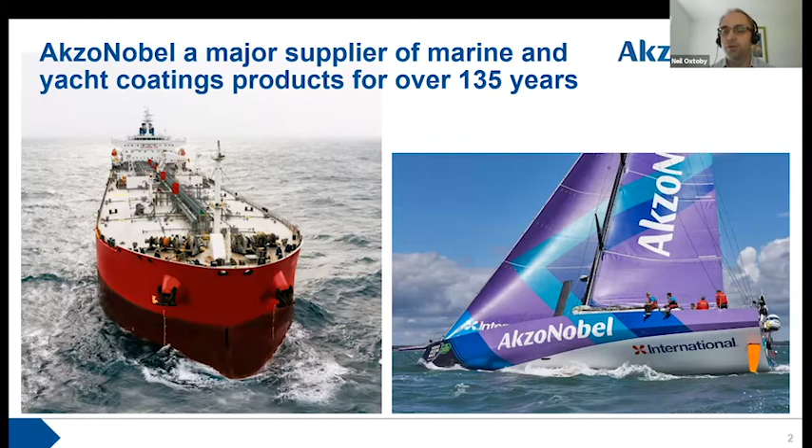As an industry and as a company, we do move ahead of legislation and regulation. So we're not just driven by that, we are trying to move ahead of that. We are proactively trying to eliminate materials that are hazardous and take a sensible view of the world. So as I said, I work in the marine and the yacht part. We're actually the marine protective and yacht part. So we coat anything that comes in contact with the sea. So you've got ships, but there's oil structures, they have fouling as well, and yachts and things like that.

So there's the brand names here that you may have heard of. And there's the R&D global footprint. So I'm based in Felling in the north of the UK, but it really is part of a global team. So I've got colleagues that I collaborate with in Singapore, in Korea, China, America, and you can see we've got a spread of labs globally here that are trying to develop products for our global customers. And we've got quite a few more manufacturing locations. So if we're to include manufacturing locations in that, there'd be a lot more on the map. So we're trying to develop solutions globally for our customers, wherever they are in the world. And they'll have different challenges and different needs and different requirements.

So if I talk briefly about what biofouling is, this is the unwanted organisms on immersed structures. There are five images, and there's quite a range there, from hard animal fouling in the top left to slime in the bottom right.

Marine architects spend a long time trying to come up with a nice shape for a vessel that makes the fuel use as minimal as possible. When you put those into the water, marine growth will start very quickly. For those of you based in Singapore, it's a very aggressive fouling challenge there, and within a few days you will start to get things growing on a surface. In the cold North Sea, near where I am, there's less of a fouling challenge, and it'll take a bit longer. So there is a need for different products for different locations, different operating profiles, different customer demands.

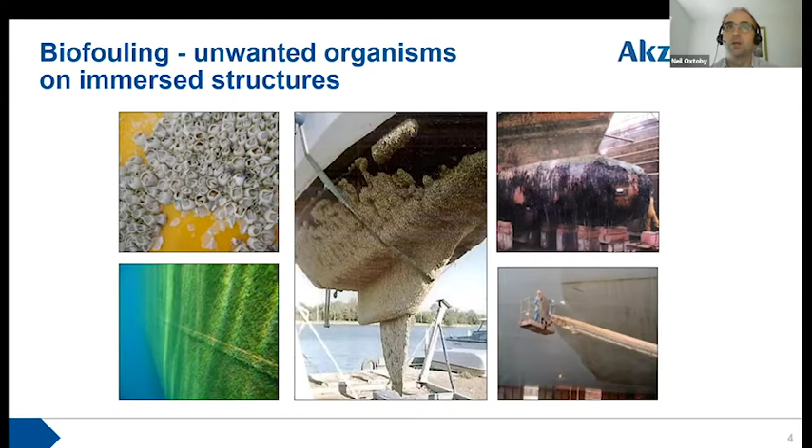As well as fuel, there are obviously other things that happen when you're burning fuel, so there are greenhouse gases. IMO is the UN body that represents the oceans, so it's part of the UN. They estimated in 2014 that if the global shipping industry was a country, we'd be the equivalent of one of the top 10 countries in the world in terms of greenhouse gas emissions. That is because most goods are moved around the world by shipping.

They had 4 estimates in this 2014 study that CO2 emissions would grow between 50 and 250%, depending on various economic outputs and scenarios between 2014 and 2050. There's also an ambition to reduce the levels by 50%. So there's a mismatch there: a growth in greenhouse gas emissions and a desire to reduce them. And biofouling can have a big impact. It can add 40 or 50% to a vessel's whole emissions. So by using the right coatings and reducing the drag, you can reduce fuel and also the associated greenhouse gases.

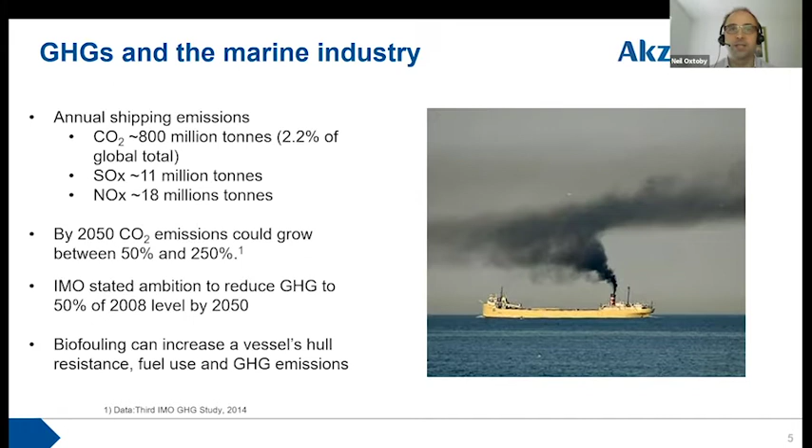There are some recent changes in the fuel landscape. IMO, this UN body of the sea, at the beginning of this year introduced a reduction. There's been a sulfur limit on fuel use for a few years; I think 2005 was the original global restriction. And that's been reduced from the beginning of this year. A 77% drop is their estimation. So it's going to have a big impact on human health, especially if you live near a port city or a coast, and it's also going to reduce acidification of the oceans and various other things.

But one of the side effects of this for the shipping industry is that you need higher quality fuels, so this is again pushing up your fuel costs. So again, there's an economic driver for vessel owners to use a good anti-fouling to prevent the fouling. The alternative to a better fuel would be a scrubber, which would remove the sulfur before it's emitted, but that again is cost.

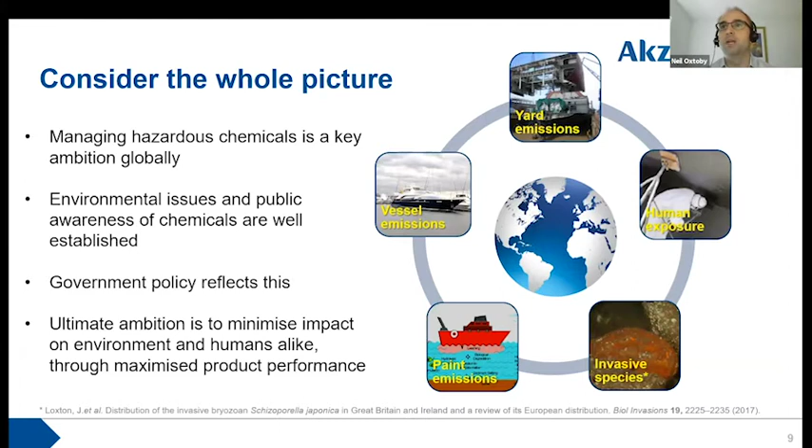Specifically for anti-foulings, there's quite a lot of regulation. So again, at an IMO level, a global level, there's the Anti-Fouling Systems Convention. This is sometimes referred to as the tin ban. This was used to ban TBT. More recently, under that global convention, there's another biocide, cybutryne or Irgarol, that is being proposed to be banned at a global level. COVID has delayed that, but that's likely to go through this year, and then with a time frame to follow in the next few years.

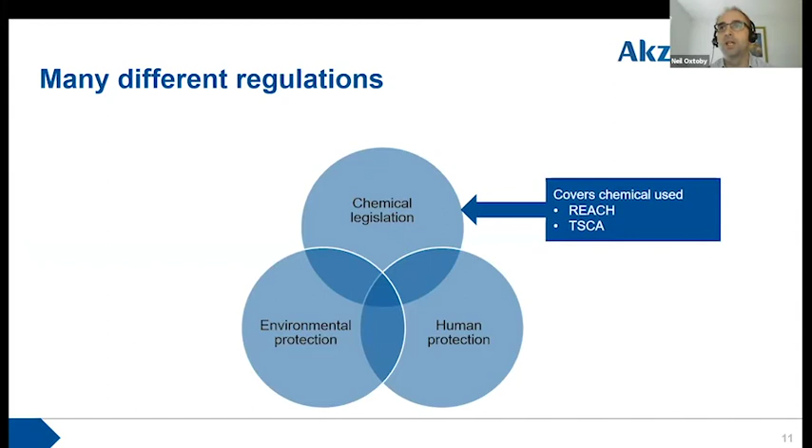There's regional regulations, so BPR and things like that at an EU level, and then there's a lot of national. There's Turkey BPR, KBPR, Australia and the US all have these. So regulations are rightly in place to ensure the responsible use of biocides. But there's not just those regulations that impact on anti-foulings. So there's chemical legislation. This is things like REACH that are covering all chemicals used in all coatings. There's human protection at lots of different points, so application, removal, things like dermal contact with the coating.

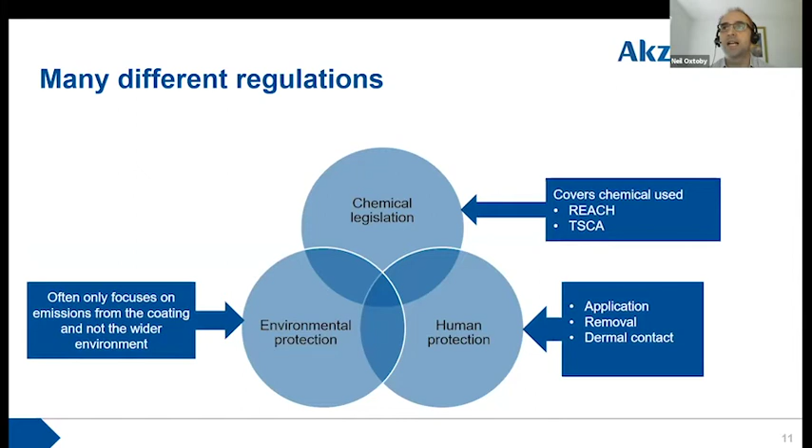And then there's environmental protection. So this often focuses on what comes out of a coating, but there's also those greenhouse gases and NIS impacts that should be considered. So anti-fouling coatings sit in the middle, and I've shown them overlapping, but they don't always overlap. So sometimes the legislation and regulations don't always work in the same way. And there's a danger that they don't have a harmonious regulatory landscape.

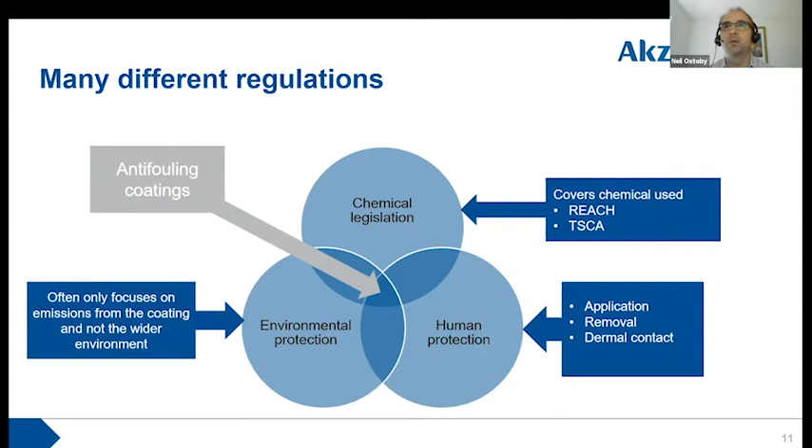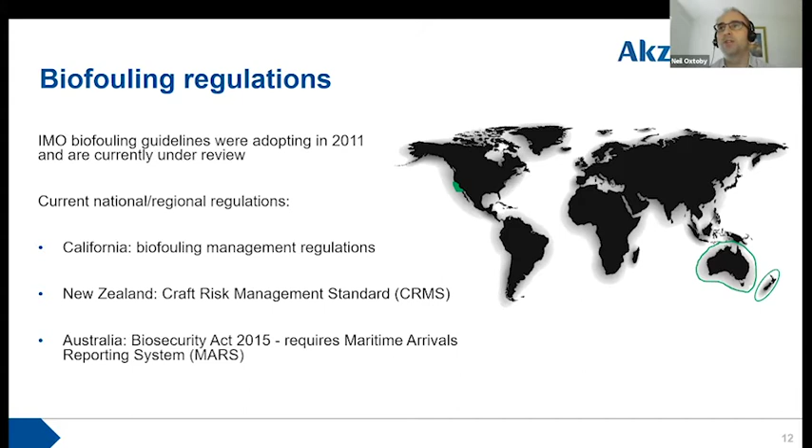A slightly different sort of regulation is the biofouling regulation. So this relates to the amount of fouling that's on the vessel, how good a product you have. So there are some countries that are now looking at how much fouling is on your vessel, how clean it is. And as I talked about earlier on, the best way to prevent fouling is to have a good coating system. So there's California and New Zealand, and Australia has a Biosecurity Act, and they don't have formal regulations yet, but they're on the cusp, I think, of having those. So there's some regions where, as a ship owner, it's important to have a clean hull, as well as having other things.

So in summary, there's a lot of regulation and legislation, but you need this to work in a harmonious way that works together. You could imagine that if you had overly conservative modeling, so some of the regulations are based around modeling, and if these are overly conservative and take something that's beyond a realistic view of the world, there's a danger that you may unnecessarily remove products from the market. If that happens, then you're reducing availability of effective products, and potentially, in an extreme case, all the effective products in a particular market. And that will lead to increases in greenhouse gases and NIS.

Also, the shipping industry is a global industry. It operates across borders and regions, and so having misaligned national and regional regulations may be ineffective. If a ship owner cannot get the coatings they want in one region, it's possible that they will go and get applications in a different region. And we've got a changing landscape with these products. A changing landscape should stimulate innovation. But unfortunately, there's also a lot of uncertainty. And it's that uncertainty that's hindering the innovation, I think, in this area.

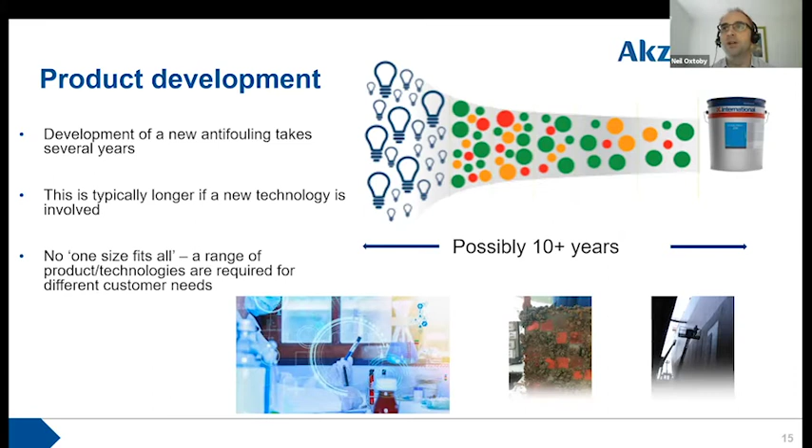So there's been legislation and regulation for a while, but this hasn't ceased the development of new products. So there are new products still being developed. There's a couple on the right from my company, but there's a range across the industry. So new products continue to be developed.

And I think customers are better placed than ever to really understand the performance of an antifouling. So there's ISO 19030, which is an ISO standard allowing customers to look at the fuel they are using and link that to hull performance. So they're then able to understand, is the hull performance they're getting and their fuel use really down to the antifouling choice? And understand and measure and maybe justify internally the choices they're making in their antifouling.

So that's very data driven and fuel and sensors, but there's also drones that allow visual inspection. So it's a lot easier than it's ever been to have a look at what is on your hull. Is there any fouling? Is your coating system working?

There are a small number of biocides that are available. So I think the focus is going to be on making the optimum use of this available toolbox. It's possible that new biocides will come onto the market, but there's a huge cost. This was mentioned a couple of weeks ago in the first webinar. There's a big cost, a big barrier to entry for a new biocide. So it's not impossible, but I don't see a huge number at all coming. So I think the focus will be on making the optimum use.

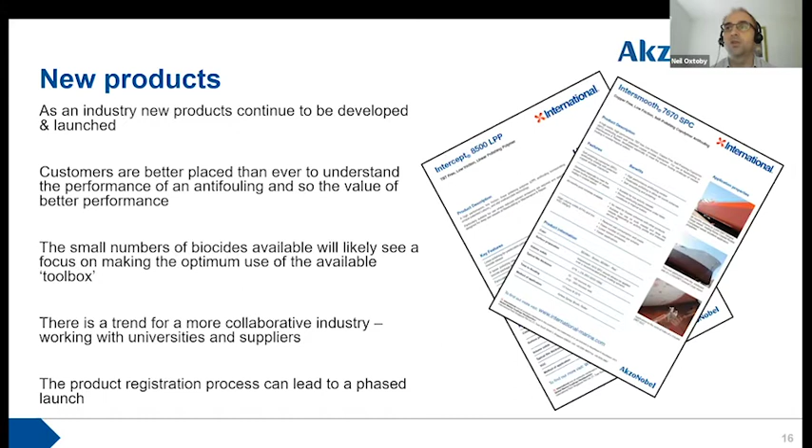And I also think there's a trend for more collaboration. As I talked about at the beginning, I'm part of a global team within my company, but there's also a lot of work with universities and suppliers and third parties. So I don't think anyone has all the answers anymore and can do things in isolation. On product registration, this can lead to a phased launch. So you could be getting some products in some regions faster than others just because of the process of registering a product.

So until now, I've talked about biocidal products, and there are other options. Biocidal products dominate the market. But for some customers, there are effective non-biocidal fouling control options. So fouling release has been on the market for over 20 years. And for some customers, this is a better option. It gives them less fuel use, less drag, less invasive species, all of those things. So it doesn't work for all customers.

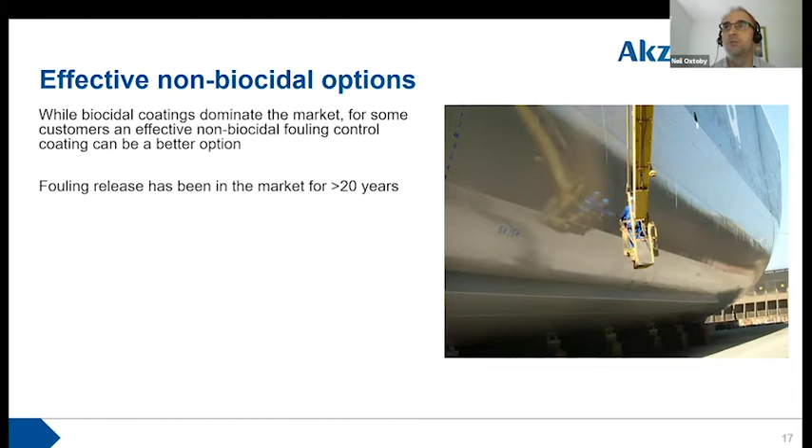But there are some areas of the market where there are some non-biocidal options. And then there's alternative technologies. So as I talked about collaboration, AkzoNobel are working with Philips to look at an alternative solution. So we're looking at UVC. This is used to prevent fouling in different scenarios, and it does work in a marine environment.

So this is a tile here. This is where there was UV that was preventing the fouling that's grown around it. So there are other options, but as I talked about with product development, this is a more different technology. This is using tiles effectively to tile a hull, and therefore your product development timeline becomes longer.

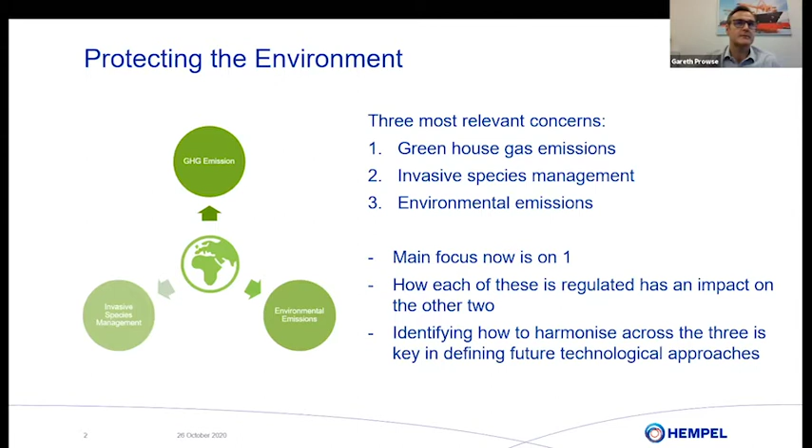So if we go into a bit more detail on greenhouse gas emissions, if I can get my slides to work, sorry. We see that the biggest focus now at IMO is to decarbonize by 2050, as Neil's pointed out. So we've got initiatives in clean fuels, retrofitting equipment to vessels to improve efficiency, and then ultimately novel vessel design, which are various designs now drafted, getting ready to be produced and built in the future

to give us this decarbonization process by 2050. The efficient vessel design, which is seen as the sexy stuff or the heavy engineering where everybody focuses in these discussions, that introduction of these designs is very slow, and we'll touch on why that is in the future slides.

Retrofitting of new equipment is generally costly, but we're going to see some changes there as IMO bring in the revised EEDI rules, the Energy Efficiency Design Index rules, which will move things forward in terms of what vessels have to achieve. And major improvements need to be put in place very quickly because the lifespan of a vessel is very long. So if you don't have stuff in place by 2025, you're never going to hit the 2050 targets because the vessels won't be renewed because the owner wants to keep them in operation for the longest period of time possible. So in that regard, hull efficiency remains critical, irrespective of the solution adopted.

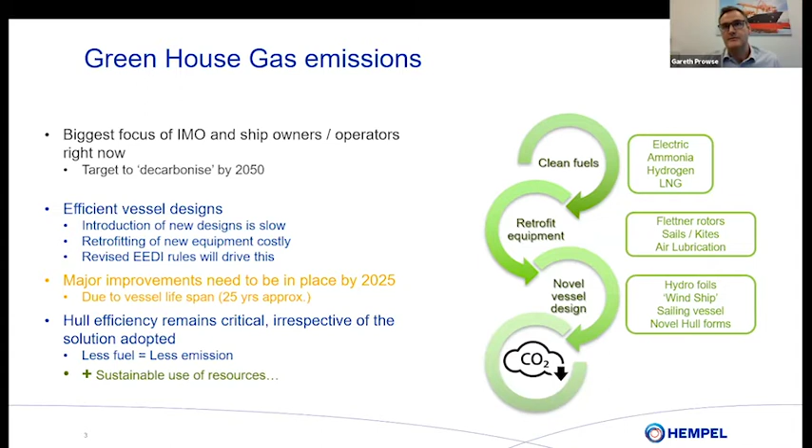Less fuel equals less emission, plus a sustainable use of resources. There's always a cost in terms of carbon release. Sometimes at the stack emission if you're using fuel there, but if you're using clean energy like ammonia and hydrogen, you've got a production aspect to that too. So the sustainable use of things is very important to achieve these CO2 emissions reduction. The solutions are being used right now.

The survey of vessels built in 2013 to 2017 showed that lots of vessels were actually complying with the IMO interim target 2025 to reduce emissions by 30% right now. So 70% of containers, 26% of oil tankers. So it looks like we're making good progress, but when you look at the actual numbers involved in that cohort of vessels, actually we're making big progress in small areas. Where we need to get things moving is on bulk carriers, where there are lots of vessels out there, but progress to efficiency is actually quite low. So only 1% of bulk carriers carrying these devices or improvements to pick up their efficacy.

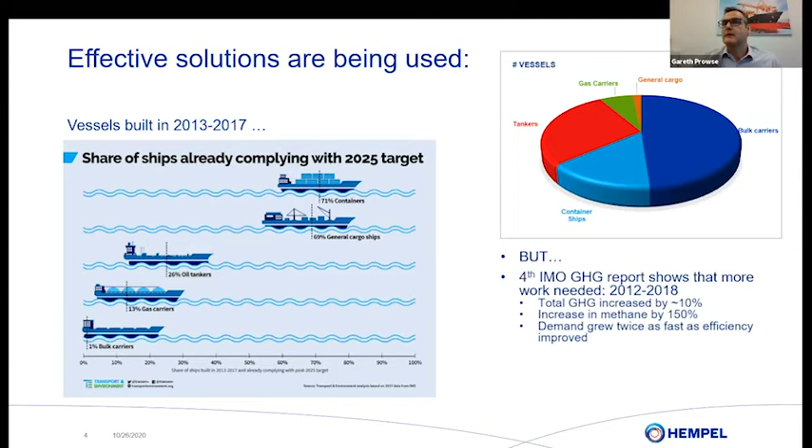And also when you look at the fourth IMO greenhouse gas report, we can see that we're not hitting the targets now. So total greenhouse gas increased by 10%. There was an increase in methane by 150% as vessels started to convert to LNG, and demand grew twice as fast as efficiency improved. So there's a big increase in efficiency need across the fleet, and coatings can provide a real solution here, particularly biocidal ones.

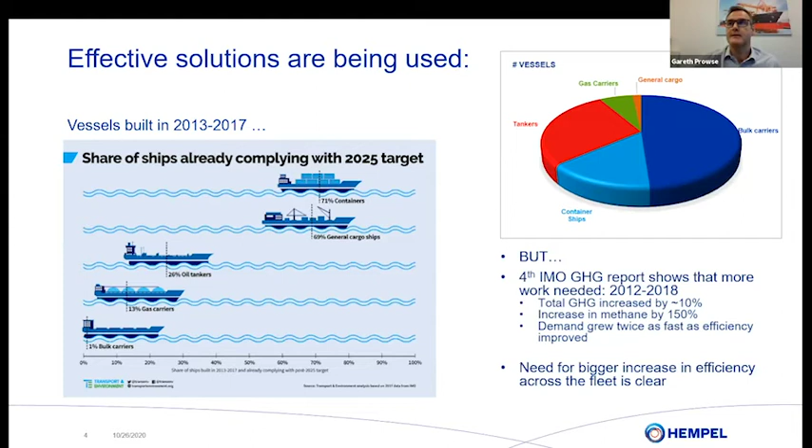So if we look at how we're going to mitigate these greenhouse gas and invasive species emissions, the key is on hull efficiency, as Neil's alluded to earlier. Irrespective of the vessel design, it can be the most efficient vessel, but if you can't keep a smooth hull and a propeller, then you're never going to achieve the efficiency of the vessel that you want. So there are two aspects to look at in this.

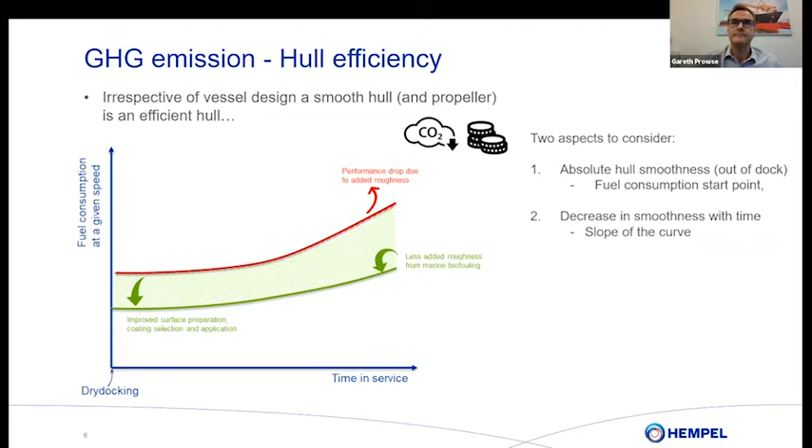One is the absolute hull smoothness out of dock. So this is on the y-axis, where your line, your fuel consumption starts with the perfect hull form. And then the second aspect is a decrease in that performance with time as the hull becomes more rough. And that is associated with fouling on the vessel as you move through time in service. So between getting recoats. And the current approaches in the markets address those issues, particularly for coatings, but the adoption of best practice across the fleet varies massively by vessel type.

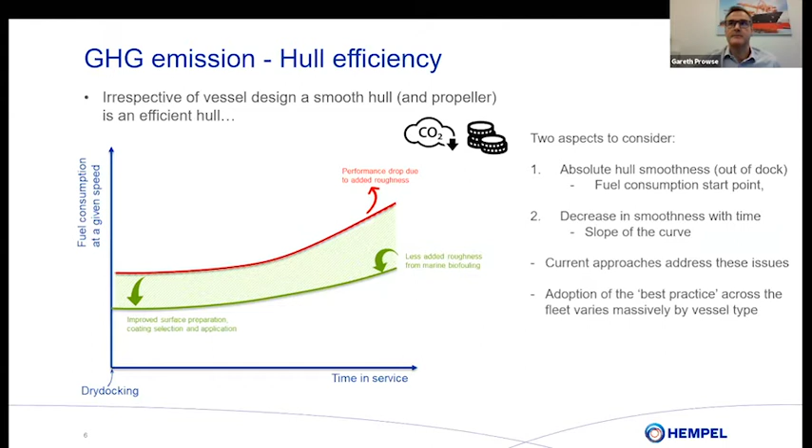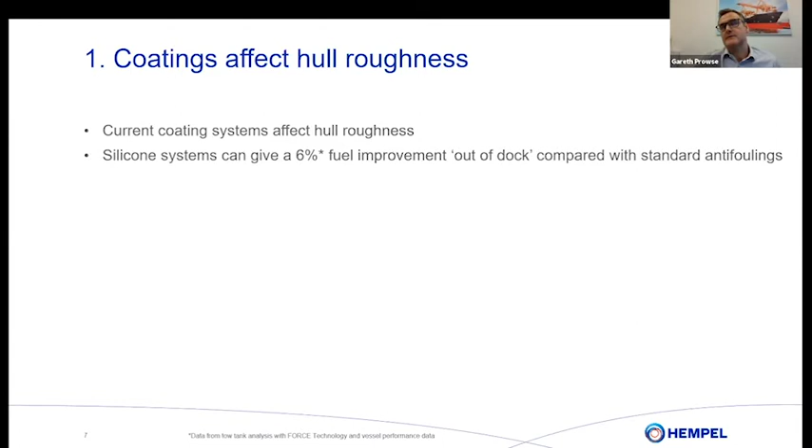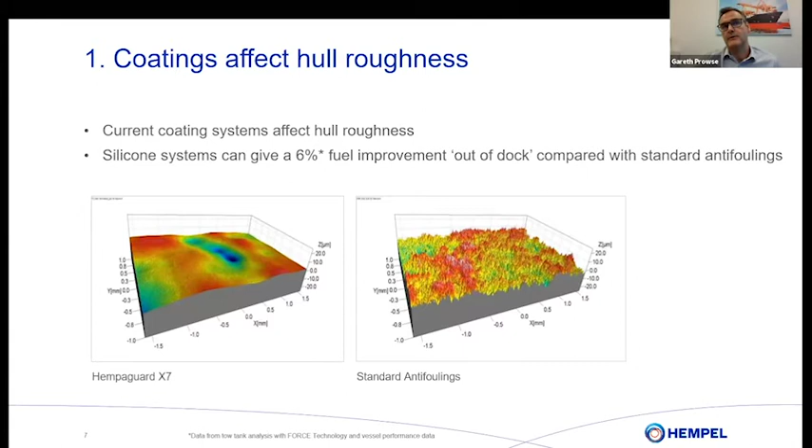So we know that choosing a coating system affects hull roughness and then fuel use and the penalty of fouling. Silicone systems are known to give a 6% improvement out of dock in terms of fuel. So just converting from a standard SPC or antifouling gives you an increase in efficiency. We know with our own silicone coatings, you can see that microscopically, but we also know that the application techniques can improve that further still. So if you've got a clean hull to start with and you control the application very carefully, and you can do that by robotic application or industrial application to films, and then applying that to the vessel as a finished coating, gives you an even smoother coating system.

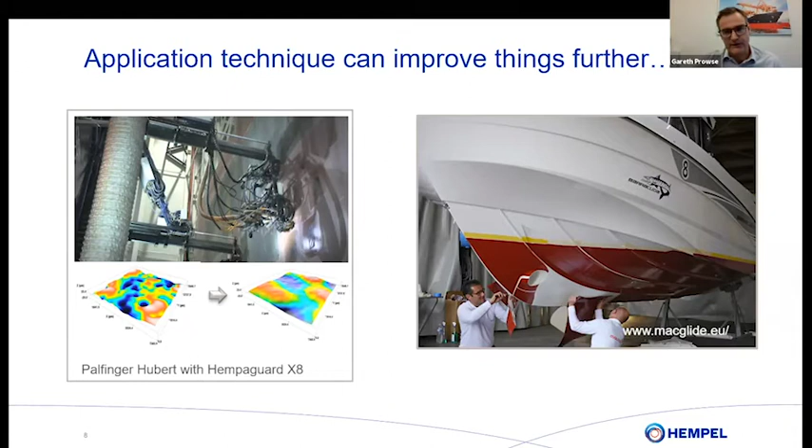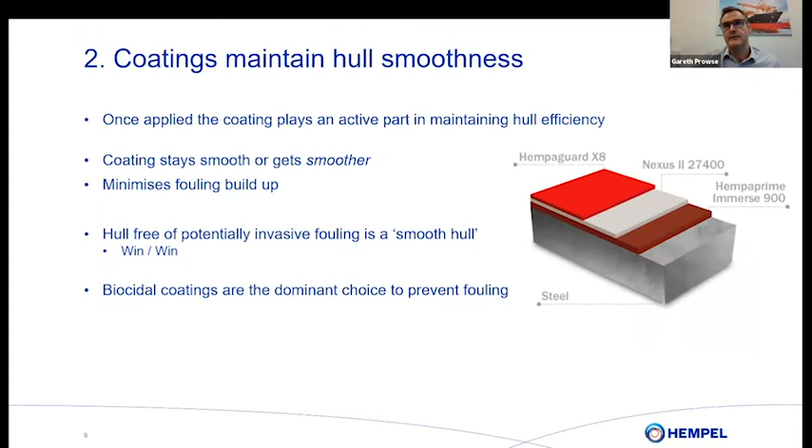So once applied, the coating plays an active part in maintaining efficiency. It stays smoother or gets smoother with time in a polishing coating system. It minimizes fouling buildup, and a hull free of invasive species is a smooth hull with good fuel consumption profile and no invasive species potentially. So there's a win-win there. If you solve one issue, then you solve the other. And right now, biocidal coatings are the dominant choice to prevent fouling. But as Neil mentioned, coatings are not all born equal. Getting the right product for the right job is important.

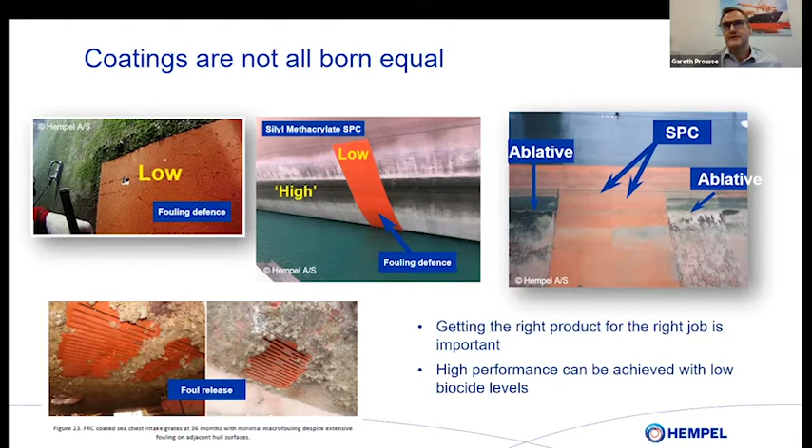You see big differences in performance from one coating to another when you choose and select for the vessel. Not only that, what you see is a very big difference in the amount of biocide that you use. So in these images, we can see a zero biocide fouling release working very well, compared with a standard SPC product, which isn't working too well either, with high biocide loading.

We see extremely good performance with fouling defense coating, which is a silicone-based system using low-level biocide to give you extra performance. And then you can see comparisons between those fouling defense coatings and silyl methacrylate, but you can also see big differences between the ablative coatings and the SPCs. So product selection is really important.

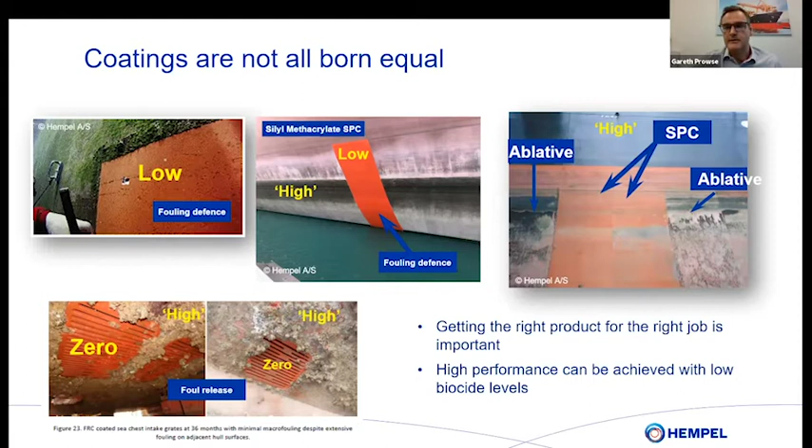High performance can be achieved with low biocide levels, but what we don't see is the best product always being used in the right circumstances, which means more frequently now we see a shift towards cleaning of vessels. And there are two types. One is proactive grooming. You clean before the fouling gets to the extent that there's a penalty, or there's reactive cleaning where you know it's got quite bad, so then you go in for a clean.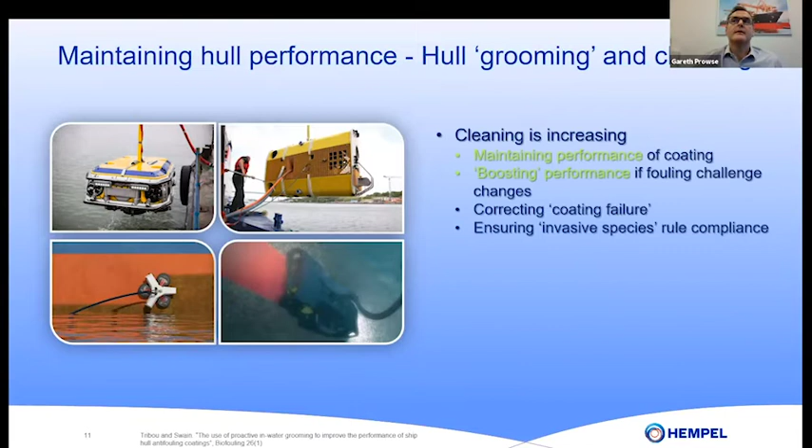And these require good data and information about when to clean. There's a trigger there. But once you do the cleaning, you're either maintaining the performance of the coating or boosting the performance if the fouling challenge changes. So if you need to change the route of your vessel, it could be correcting the coating failure, or it could be maintaining compliance with those Australian rules. I need a clean hull to enter your port. This is how I do it. I can clean, and then that proves that it's free of invasive species.

But cleaning isn't always an easy option. So you still have an emission aspect to this. Certain ports don't want you to clean in their waters because they have concerns about emission, either paint flakes or biocide removed too quick, or the invasive species themselves. There's a lack of availability. You can't clean in every location you want, and a time constraint to that affects what the vessel can do. He doesn't want to delay while he's doing his clean.

The final comment from a coatings perspective is that if a coating isn't optimized for cleaning, you can damage it, and then that will drastically affect how well it performs. So both of these approaches are sound, but they need to be applied properly with a good understanding of the challenges ahead for that clean and where you're going to clean, which is a complexity that the customer isn't always prepared to take.

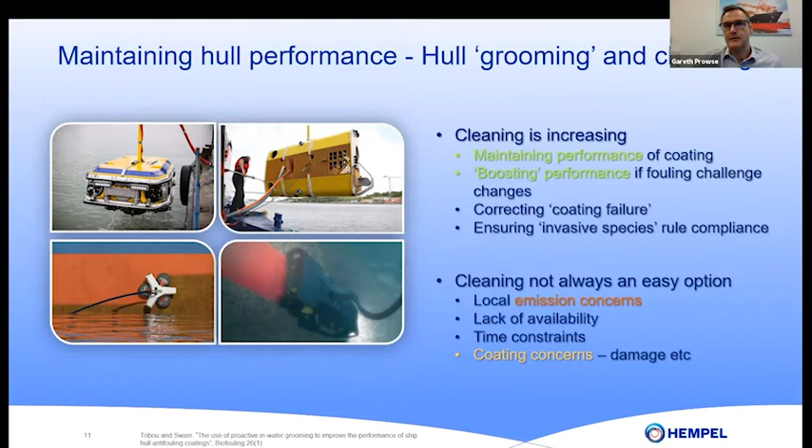Which takes me into the environmental emissions. So what does this mean from an emission perspective? How do these solutions align with the need to reduce environmental impacts? And can we move away from biocidal or chemical approaches to fouling control? So this is really the challenge to us as scientists, academics, and industrial actors in this field.

The next big thing that we see is the legislation that Neil mentioned. Chemical emission laws are restricting the use of products that we sell right now. Invasive species control is driving the need for better products. So you have a conflict there for promoting biocidal products or more toxic products to give more kills, so cleaner hulls, etc., versus something which is trying to balance the use of those chemicals so you don't cause adverse effects in the environment or to the people that use them.

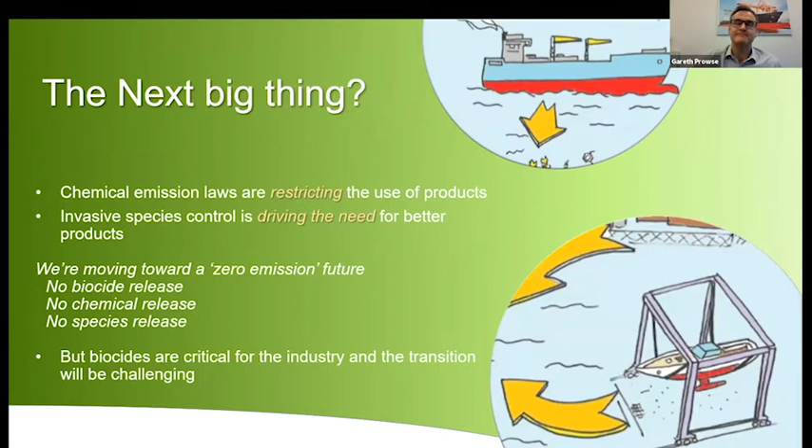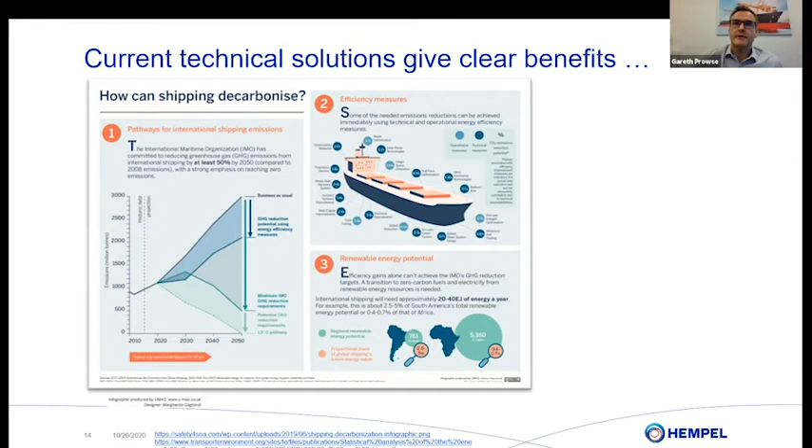Ultimately, though, we're moving toward a zero emission future. No biocide release, no chemical release, no species release. And biocides right now are critical for the industry, and the transition for that will be challenging. There's no doubt that the current technical solutions give clear benefits. So when you look at what the tools are available to owners right now, we can see that there are various ways to make a more efficient vessel. Coating solutions are part of that.

And we can see that advanced hull coatings, really good ones that perform well, can give you up to 10% reduction in fuel and energy efficiency. And that compares directly with some of these more expensive engineering controls like wind assistance and hull form optimization and so on, and propeller changes. So it's clear that coating solutions give genuine benefits. But not only that, the return on investment is typically really quick, so that you get your money back for the fuel saving very fast compared to putting in a big engineering control. And they're retrofitted very easily.

So you get improved efficiency with low technical costs. Everybody can apply a coating. We're used to doing it. So working within that as a solution gives us a big opportunity to make a significant contribution to CO2 reduction. And the efficiency right now is on par with the more expensive options. So ultimately, a smooth, fouling-free hull is still a key area for performance going forward, and that's not going to change.

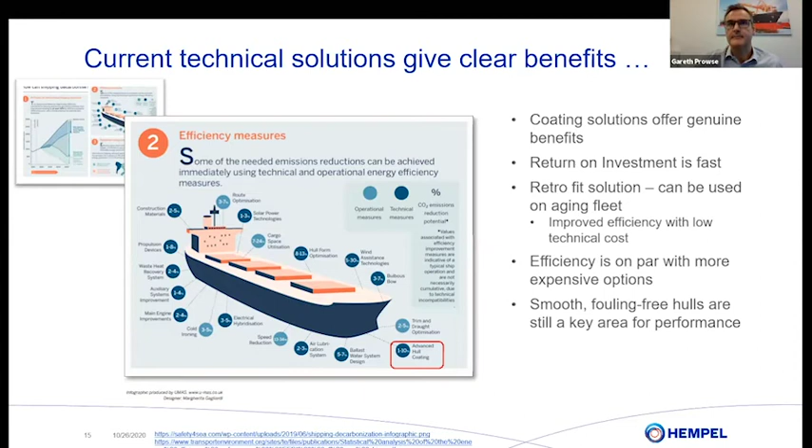Another study, Green Ship of the Future, looked at some of those solutions and tried to assign how much saving you would get on a typical vessel. And what we saw with Hempel's coating, a silicone-based system, is that actually you get the largest CO2 saving with the shortest return on investment of any other option you can put out there, whether it's a Flettner rotor or a propeller change. So it really does support the fact that there is space and there will be a continued need for effective coating solutions and hull coatings that are easy to apply.

And right now, it appears that the most efficient solution is biocidal coatings or effective biocide-free coatings where they're appropriate. So there's a big potential for coatings to contribute to this reduction. They're easy to install, as I mentioned, and they're cost effective. However, getting a best-in-class product is difficult. The owner doesn't always take the best product for his vessel. The majority of the tonnage is cost conscious. Convincing companies to take new or better products is challenging. So changing behavior in the industry can be quite difficult.

And there's a perception in some areas of the fleet where an aging fleet isn't worth investing in. It's a wasting asset, it's getting old, it's going to be scrapped. So why should I spend money on expensive products to give me fuel performance? And a lot of that comes from that you've got this complex environment of different people with different objectives in managing and running a vessel. So that is a huge challenge to bringing new things to market.

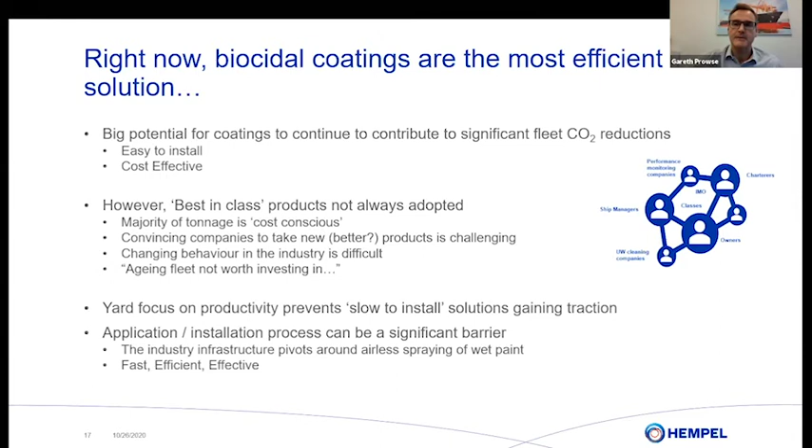On top of that, you've got a yard focus, which is on productivity, how quickly they can get a vessel out. And the application and installation process is a significant barrier to introducing new concepts sometimes. Industry infrastructure pivots around airless spraying of wet paint. It's fast, efficient, effective. So when you try to use films or robotic application, that's an additional barrier to get a new efficient system into place. So it's not always about the biocide use or the coating technology, sometimes it's the application.

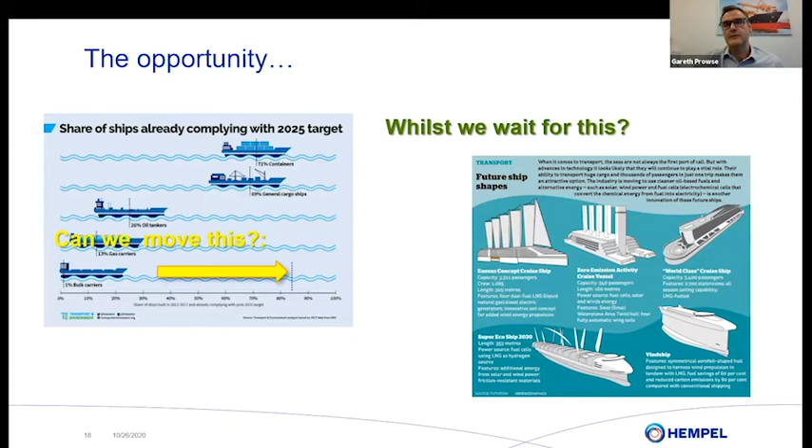So the real opportunity in the interim is whether we can move this whilst we wait for this. So what can we do with biocides or coating solutions or other easy to fit options while we're waiting for these grand designs to come through the system and process? And whilst we're doing that, we need to think about what zero release could look like so we can stay ahead of those legislations.

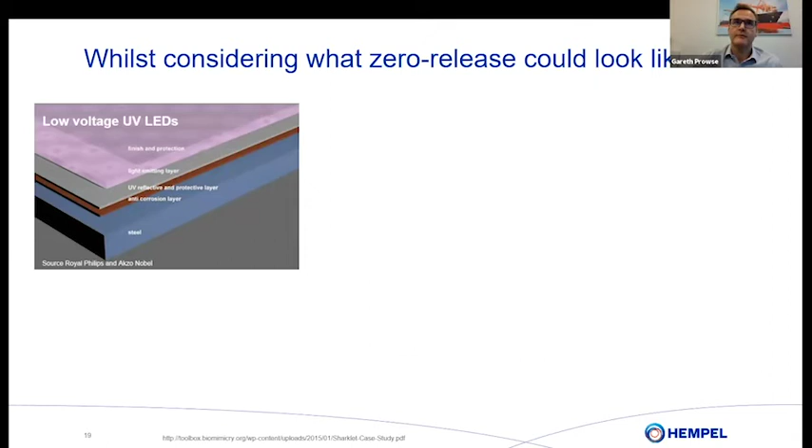So Neil's pointed out the UV LEDs, they're very effective, they work really well, but you've got an installation issue there. We see lots of activity with ultrasounds and they can work very effectively. But the jury's out on how many vessels that works for and whether it's sufficiently good for all vessels, whether it would be a real solution for a zero release system.

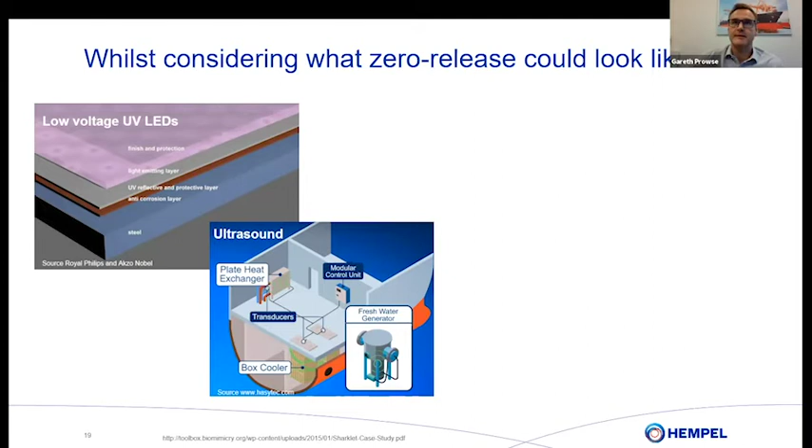Next generation foul release coatings, Neil's already alluded to the fact that they're out there right now and they do very well. I'm sure the technology will continue to improve and they'll take a much larger proportion in the market going forward. But there's still an issue around the application side of things where yards don't like to use silicone-based systems because of contamination concerns. So does that take us into textured surfaces as a potential option? So there's still plenty of scope to move these things.

A final comment on that would be, I'm really interested in biocides in terms of minimizing their release, so tether them so they're active at the surface, but they're not released into the wider environment. So we need to think more broadly than we're just going to lose biocides. Can we be smarter in the way that we use them? The coatings industry has been very good at that. You see a general reduction in the amount of biocide that we've used over the past 20 years even, as we become smarter with the resin technology we use to deliver the biocides.

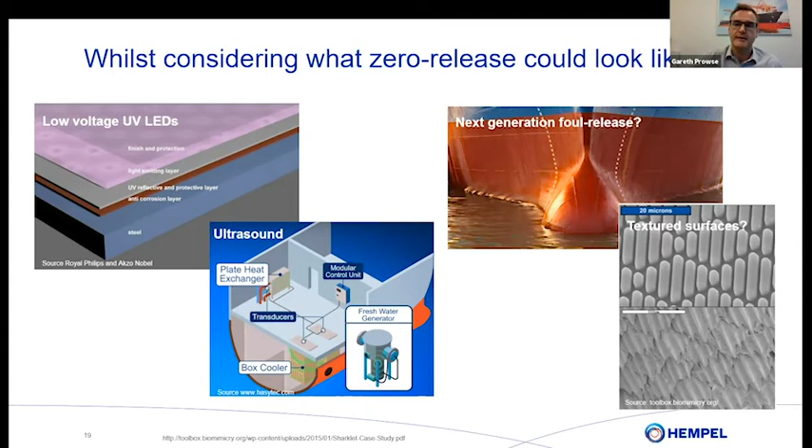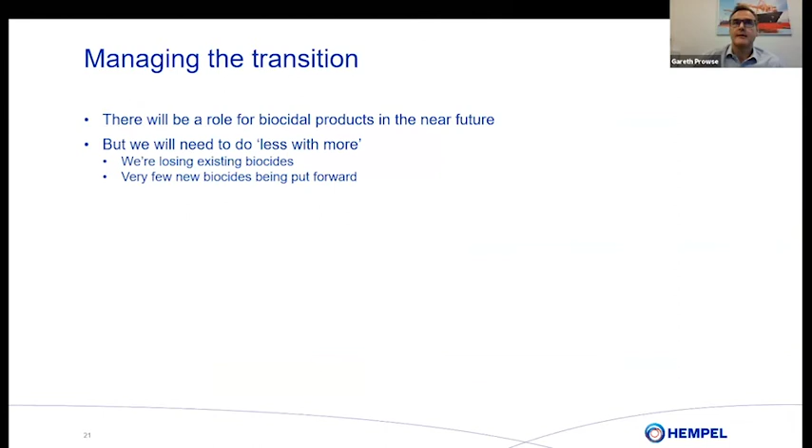So I think we'll be moving in that direction further still over the next 5 to 10 years. So some final thoughts. It's all about managing the transition. So there will be a role for biocidal products in the near future, but we will need to do less with more. Neil mentioned losing the toolbox. That's very true. We're losing existing biocides. And there are very few new biocides being put forward because the regulatory hurdles to bring something to market are extremely high. So we're looking at trying to do more with less.

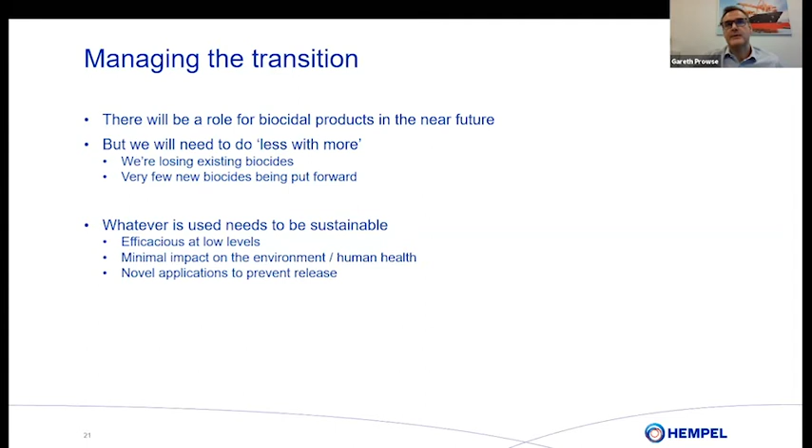Whatever we use and whatever we go forward with has to be more sustainable. There's never been more pressure on reducing chemical emissions, plastics in the environment, the perception of circular economy and how we make that work for coatings and all the rest of it. We really do need to focus on the sustainability aspects of what we take to market. So having these novel applications to prevent release will play a key part in my view on those things.

So effective high performance biocidal products offer a fit and forget approach, which is extremely beneficial. So you paint the vessel, if it works really well, you send it out for its 5-year schedule life. If it doesn't need to clean, it doesn't need to come out of service, it just comes back clean, that's perfect. It's operational efficiency, cuts down on the wasted time, reduces the risk of emission from cleaning or from interventions elsewhere. And that's a really ideal situation for a coating. That's what we're all working towards. And that's what I mean when I talk about best available technology for each category.

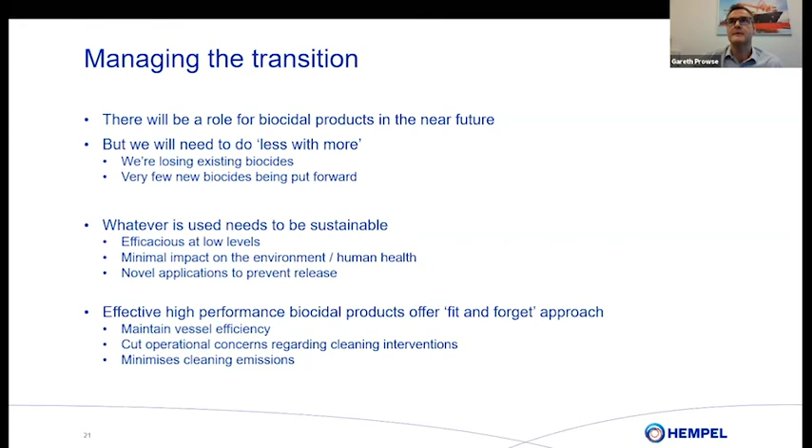I think I've got a duplicate slide coming up here. So a fit and forget approach.

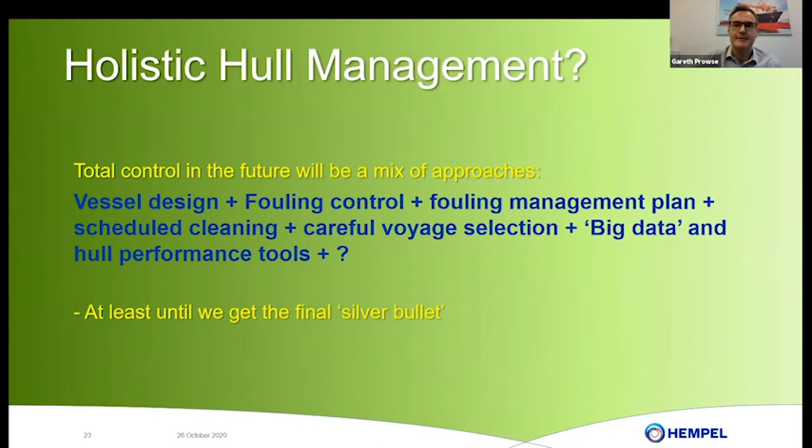I think we're starting to see customers and operators think in these ways. And so it's going to be really interesting to see what they do with the existing fleet going forward over the next 5 to 10 years as they need to hit these new targets. And that's going to be critical, at least until we get a final silver bullet. And it's debatable whether we'll find that one-size-fits-all solution for underwater hull control.

But it also means that for sustainable use, we've got to be connecting the legislation. So it's not good enough just to control biocide emissions. We need to look at everything: dockyard emissions, cleaning emissions, resource production emissions, vessel emissions, and so on. So really taking a life cycle analysis to understand the cradle to grave assessment of these products.

We can ban all the biocides, we can ban all the chemicals, we can have chemical-free solutions, I'm sure. But do we do that at the expense of higher greenhouse gas emissions, greater risk of invasive species being delivered, bigger environmental impacts from these other areas of production? So we really do need to think a lot more holistically in everything we do, the solutions, but also the life cycle impacts that we provide when we take these things to market.